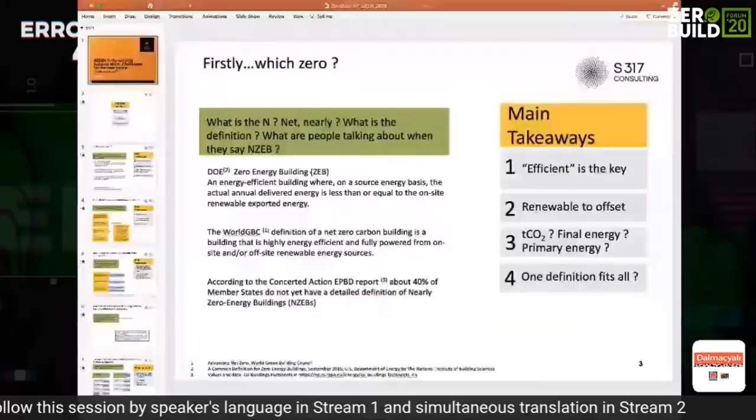Mr. Feliz, sorry to interrupt, but we are still seeing the cover page. Yes, okay. I guess you shut down the slide mode, and that works now. Okay, perfect. Just a little bit. Like this is okay. Could you please switch the pages? Perfect. Like this, it's okay. Okay. Thank you. So sorry. I cannot see what I'm doing, so please interrupt when you see that something is wrong.

So I was talking about the difference between the interpretation of net zero and nearly zero and so on. But even in Europe, where I think it's the most advanced status of net zero buildings and energy in buildings, about 40% of the member states don't yet have a detailed definition of what nearly zero means. And the 60% that already have a definition, the overall definitions are different from one country to another.

So even in a cohesive bloc like the European Union, no one has the same opinion regarding these issues. So the takeaway, I think, is that efficiency is the key. It could be net zero, it could be nearly zero, but we have to be efficient, probably as efficient as we can be. The renewable energy is there to offset the residual consumption that cannot be removed.

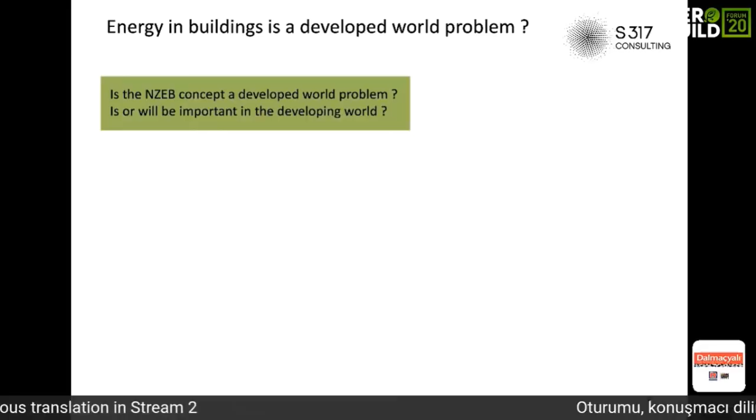Secondly, energy in buildings is probably a developed world problem. I think common sense tells us that the big buildings, the energy intensive buildings, are probably in the developed countries or the OECD countries, because that's what we know and read and see on TV and so on. So is this a developed world concept, or is it an overall global issue?

We know that the overall building energy is higher in developed countries, and we know that per capita consumption is also higher. But that's how it is nowadays. How will the situation evolve in the next few years? We know that the rate of increase in non-OECD countries is about 2% per year, so about 5 times faster than the OECD countries. So by 2025, they will be consuming the same.

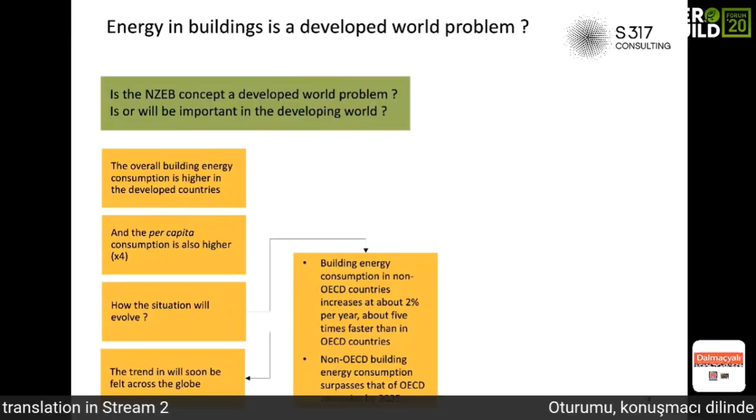And above that, I think that the non-OECD countries will be the main driver for energy consumption in buildings in the world. So it's pretty much a global trend that will be felt across the globe, and I think that we must deal with that. So the takeaways: it's a global problem, and consumption will grow everywhere. Can we find one solution that can fit all these different regions, all these different economies? I think that's one of the main difficulties of this whole concept of net zero.

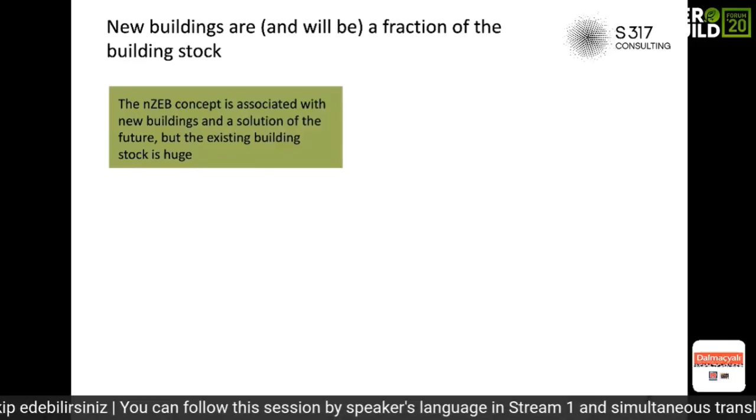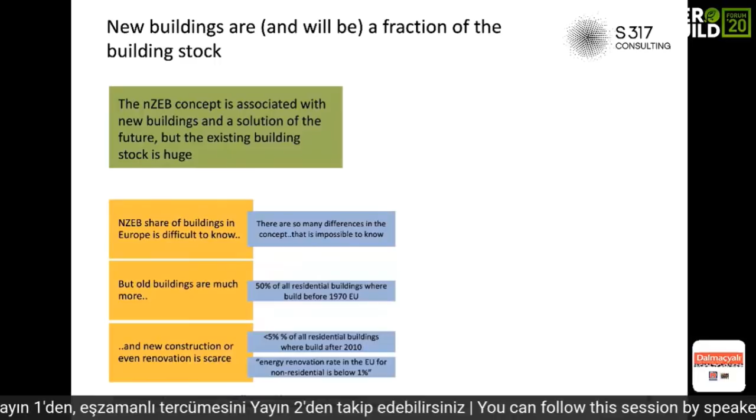New buildings are and will be a fraction of the building stock. The net zero concept is associated with new buildings. For example, the EPBD in Europe requires that new buildings go net zero, but the existing building stock is huge. So a solution for the future must be around the actual building stock. Also because it's very difficult to know the NZEB share of buildings, because, like I told you before, there are many differences in the concept, so it's difficult to know what is net zero.

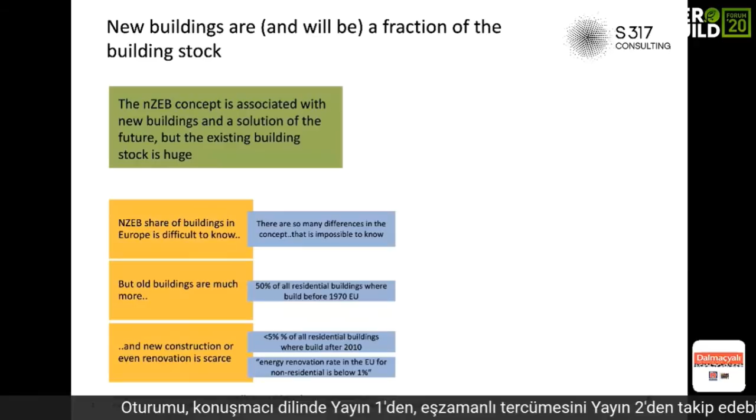But we know for sure that old buildings are much more numerous than new buildings. For example, 50% of all residential buildings were built before 1970, before there were building codes with energy consumption requirements. And we know also that new construction, or even renovation, is scarce. It depends from country to country, but normally there's not a huge rate of new construction. Less than 5% of all residential buildings were built after 2010 in the European community. And the energy renovation rate is well below 1% for non-residential buildings.

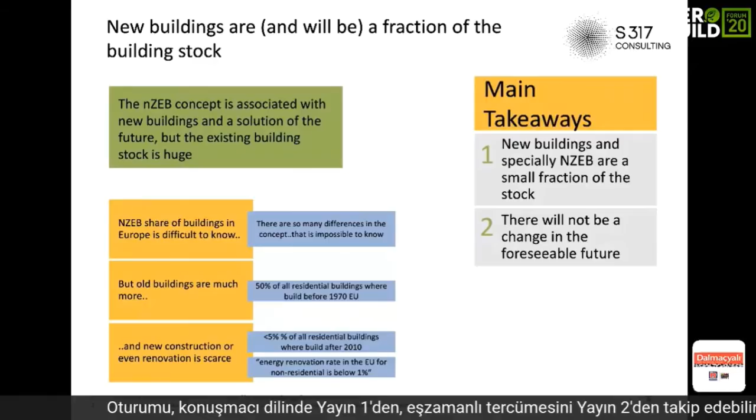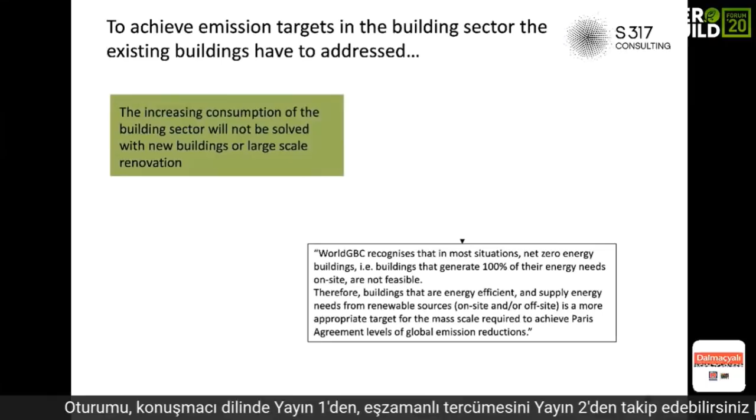So the building stock is very important to this. There will not be a change in the foreseeable future, so we have to rely on what we have now. To achieve the emission targets in the building sector, the existing buildings have to be addressed. Even the Green Building Council, an American-based but worldwide organization, says that we require mass-scale interventions to achieve the Paris Agreement levels. So we have to rely on the existing building stock.

So how can we aim for the real causes? What consumes energy in a building? Where can we improve? We have to be very sure of what to do because we don't have the money to do it all. So where can we act? We know that in residential buildings, heating, water heating and space heating, consumes around 80% of the energy. This is European Union data.

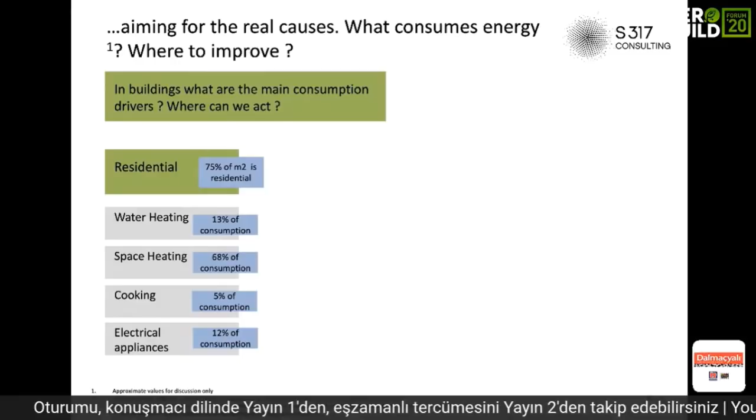Portugal is different from Germany. Germany is different from Turkey. But I think this gives a very good idea of the overall consumption. Electrical appliances and cooking account for less than 20%. This is important to know because residential buildings represent around 75% of the overall building area in Europe.

So probably in Asia and Africa, it's even more than this. So the commercial buildings, like we read in all the papers and all the books that talked about these issues, it's the HVAC, the ventilation, air conditioning systems, and lighting that take around 60%, 65% of the overall building energy. So these are, I think, the end-use consumption vectors that we have to make sure to address in the future in every measure that is thought to get a little bit of the net zero to these new builds, to these actual existing buildings.

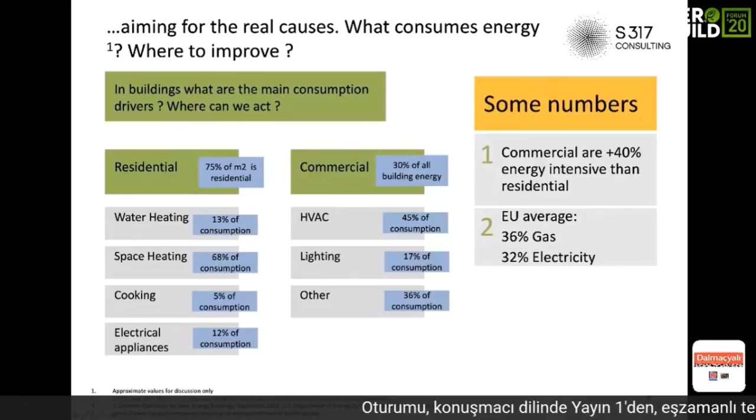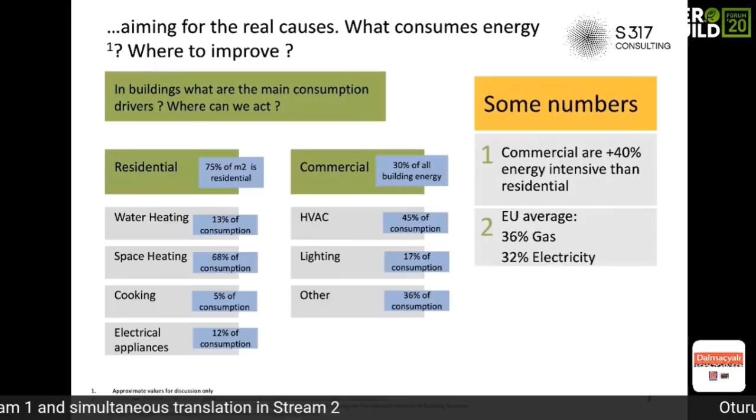So the numbers. Let me get to this number 2. In the European Union, 36% of the consumption is gas, natural gas or GPL, and 32% is electricity. So this goes really well with the heating vector. So it's fairly difficult even so to get the benefits of renewables on this without changing the overall structure of the consumption in each building.

So knowing these vectors is important, but which measures have the economic rationale for implementation? We have to make sure that we maximize the effect on the outcome, because the overall world, not just Europe, but everywhere, even more now, has economical difficulties. The financing is very limited for this. So all the measures that we take upon buildings have to be targeted to maximize the effects on the outcome, which is, of course, reducing the carbon footprint and reducing the energy consumption.

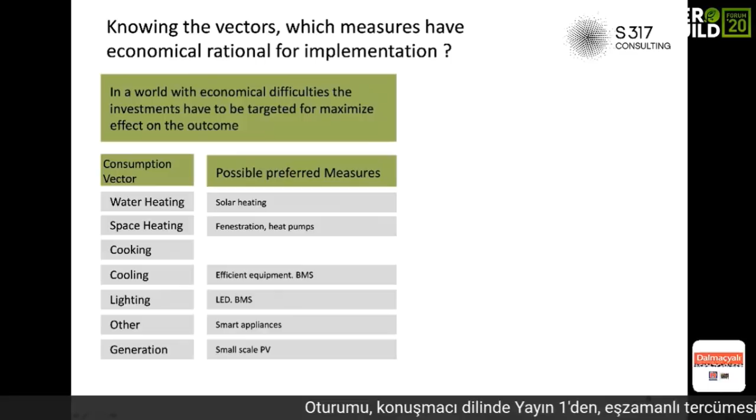So we know for sure that for water heating, for example, using solar panels is very beneficial. We know that space heating goes well with heat pumps, and changing a little bit of the fenestration, putting new windows in. For lighting, for example, we have LEDs and management systems for these, which I think are very efficient and very prone to savings. So we have to realize that we cannot go everywhere, we cannot do everything. We have to keep an eye on what is possible to do.

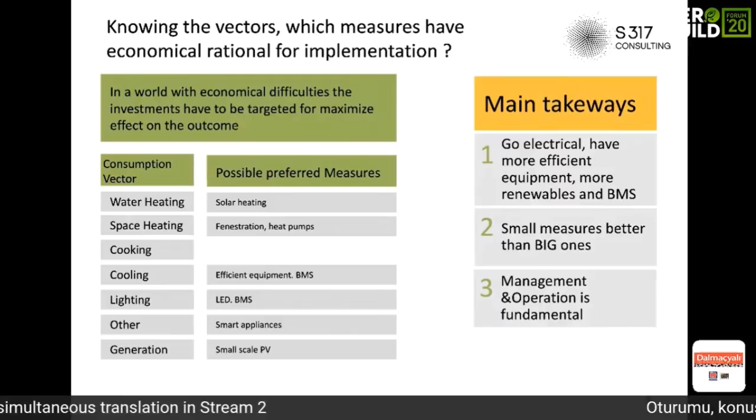So takeaways of this: go electrical, have more efficient equipment, more renewables, and more automated control systems. Probably small measures are better than big ones. They require less investment, less effort from the building owners, and less money to make. And of course, management and operation is fundamental. As we know, there's a lot of no-value or low-value measures that can be done with incredible effect in building operation and building consumption. So we have to make sure that everything is aligned to do this in a perfect and efficient way.

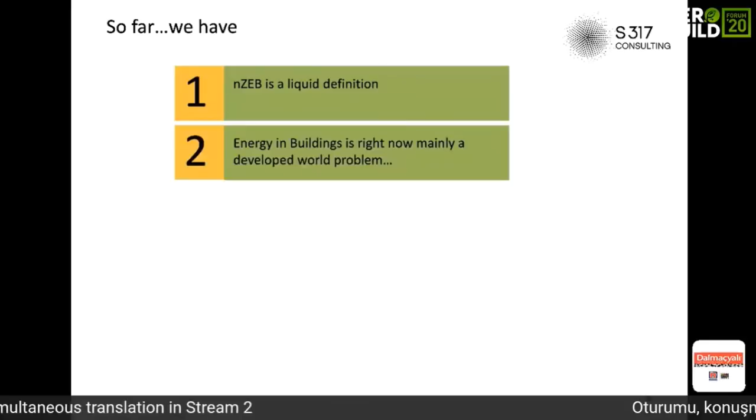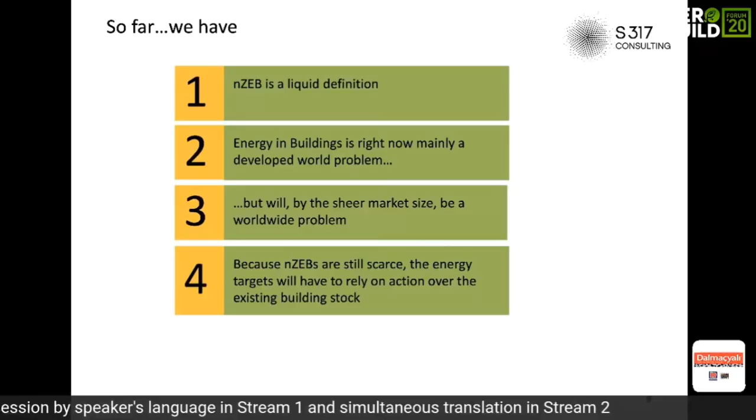So let me just sum up the presentation so far. Net zero is a liquid definition, so we never know what we are talking about, but we know that energy in buildings is a developed world problem right now, but it will be, even by the sheer market size, a worldwide problem. So we have to make sure that we have the tools to solve it everywhere. Because net zero buildings are still scarce, the energy targets will have to rely on action over the existing building stock. And with the known consumption vectors, the effort should be made for targeted measures that we know are easy to do and possible to do with our reality in terms of the economical and social issues that we are facing.

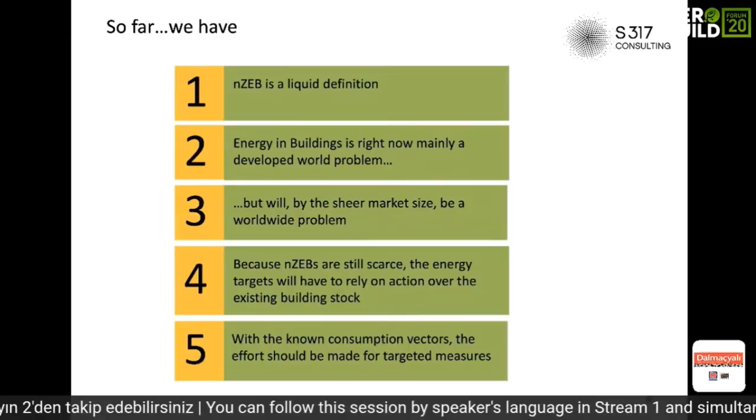So how to address the issue in the near future, while net zero buildings are marginal in number? We have to have an approach that settles all cases, new buildings, old buildings, and so on, that can help the consumption trend to be stable, at least stable in the near future. To start, it's not an issue just for the building sector, but we have to have a concerted effort between the public and private sector. So everyone has to be all hands on deck to do this.

And the main areas of intervention, firstly, is financing. So we have to sort out how to finance all this, because it's very nice to talk about net zero and to talk about energy efficiency, but someone has to pay. So we have to make sure that the financing tools are there to help this problem to be solved.

Then it's addressing the part of the efficiency that we talked about in the net zero definition. So energy services. We have to think and use a new generation of energy services and make available to all the tools for this reduction in consumption, to reduce the consumption to a minimum that can be offset by renewables. So renewables will offset the gap in reduction which is possible in each site.

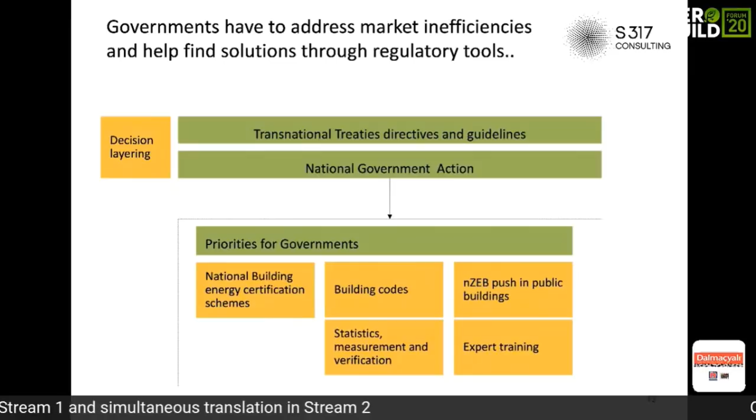Probably in the European Union there are more than these, but for example, Turkey, which is not in the European Union, has a good national energy certification scheme. We have a very good building code in the energy sector. And the government is now pushing for nZEB in public buildings too, and they are giving a lot of expert training. So all these, together with statistics, measurement, and verification, are essential tools for all governments. This can be done in the richest country or in the poorest country. But I think that these regulatory and policy tools are very, very important to address the issue.

And of course, the governments, I think, are the only ones that can give us some clever finance to solve the gap of energy efficiency in buildings in terms of financing. We all know that commercial bank money is difficult to get into energy efficiency. There's a lack of bankability for the projects. They are technically difficult to understand. They lack fixed income streams. This is important because this was the thing that could put finance money into renewables, because especially with the fixed feed-in tariffs, they become fixed income streams.

So it's kind of an annuity that is forecasted for 20, 25 years. So it's really easy to sort out the risk management of all this. But energy efficiency doesn't work like that. So it's difficult to do. It's very difficult for the banking sector to have risk management that can satisfy everyone.

So what the governments can do, they can give grants, right? It's the easiest thing to do. They can set up the tools for the ESCOs and for the energy finance market. They can make tax shields for energy efficiency. They can even set up more exotic tools like green bonds and carbon finance, or cross-subsidization for energy efficiency.

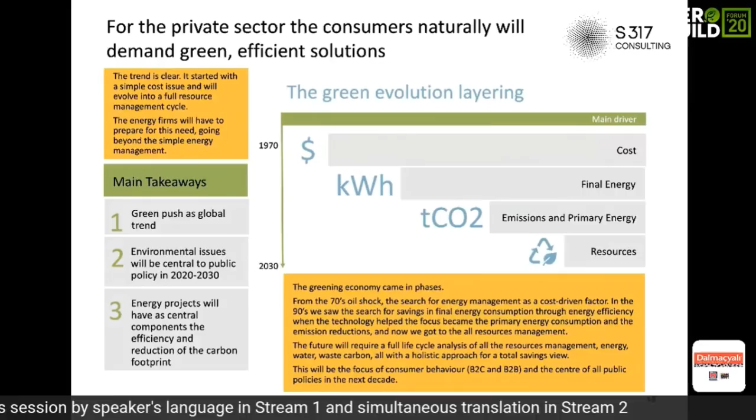So, you know, first was the cost in the 1970s, then final energy, then we started talking about emissions. Now it's the full resource, full life cycle assessment and so on. So there's a green push. I think in the richer countries, because the economy is a bit more mature, people search for different things when they have money in the pocket. So energy projects will always have these components of efficiency and reduction of the carbon footprint, whether in old buildings or newer buildings. So I think the trend is there, and we have to take advantage of that.

That will make the traditional utilities focus on energy services. So the market will go with the flow, I think. There will be no need for almost any outside intervention, and we will see new business models: PV service, energy as a service, on-bill financing. We are seeing a lot of different solutions to make this innovation and to make these services really trendy and really mainstream in the future, especially in the OECD countries.

How to do this? We talked about energy services, we talked about renewables, we talked about targeted actions. So let me give you a couple of real life examples. They are not region specific. They happen a lot in Portugal and Western Europe, where we come from. They are examples, but they will show the trend, and some measures and actions that were taken to solve all these issues. So, for example, smart grants.

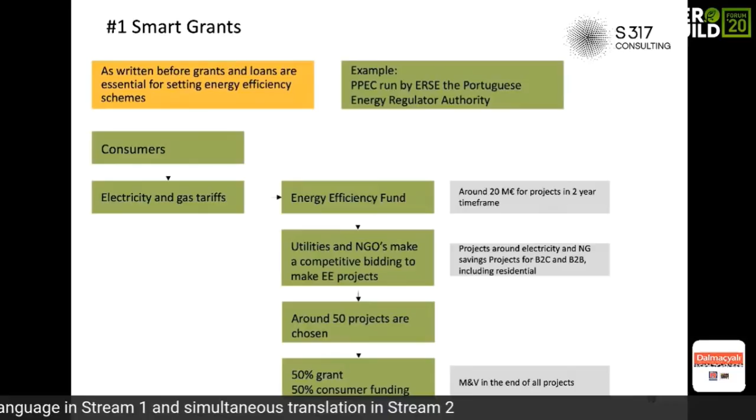This comes from electricity and gas tariffs. So it's not free money, but it's a nice way to give back to the community and to solve a lot of problems in this area.

So we talk also about the new energy services. What does that mean? These energy services are services made by contractors or made by companies that are targeted for building consumption vectors. There's a lot of examples. Who is giving these? Could be ESCO providers, could be contractors, could be window makers, for example, could be municipalities. There's a lot of entities that can help and that can be around these programs.

How is this done? So it's a government program. Could be utility services, could be consumer associations that do this. But basically, you set up programs and products that address, for example, water heating. So you set up a program that puts solar panels for hot water on the top of the buildings, the top of the houses, and they pay for that. Or changing the lights of residential places, or even changing your fridge or your microwave for a newer model.

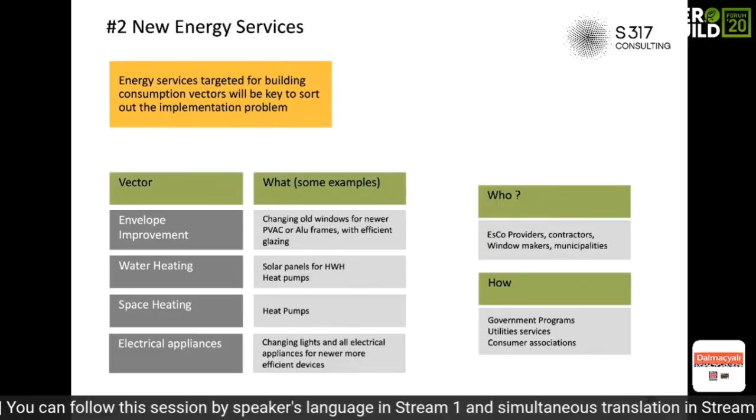This can be done with a lot of different methods, a lot of different finance issues, a lot of different ideas. There's a lot of new products, new business models to be done. Another issue we already talked about briefly is how to connect energy consumers to energy saving providers. How can we match people that want to sell and build to people that want to save? This easy market access is vital, not just in developed countries, but also in underdeveloped countries, because the problem is there anywhere.

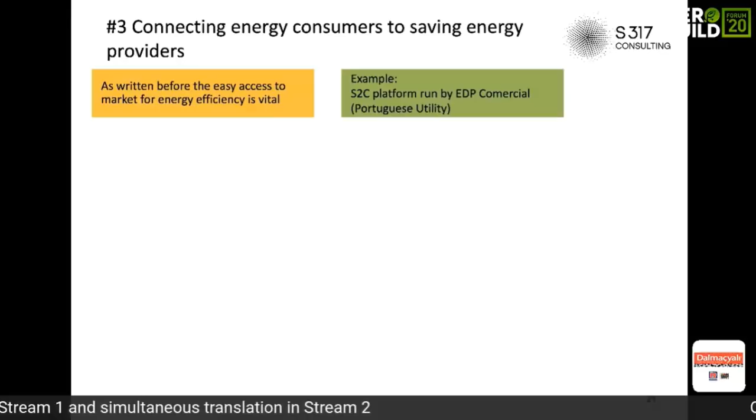For example, EDP Comercial, the main Portuguese utility, developed a web portal that acts as a middleman between consumers and the efficiency marketplace. They connect consumers to contractors and ESCOs and whoever can do energy efficiency measures. Anyone can Google Save to Compete and take a look. There's no fuss. You choose the measure, you say how many lights there are in your place, the inclination and orientation of your roof, and the system, with a clever algorithm, gives you a cost and a payback which is approximate to the reality of the consumer.

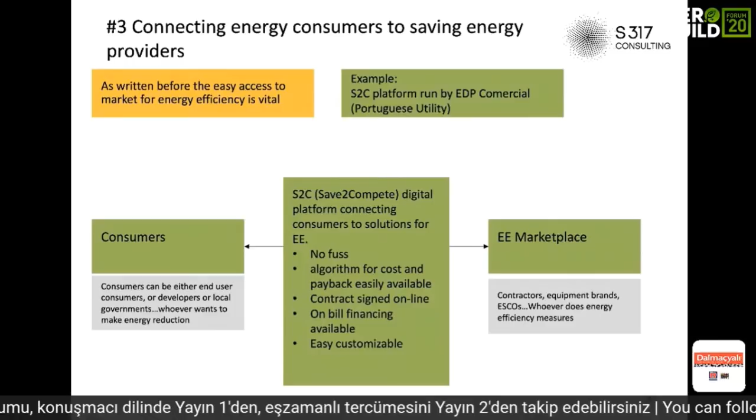You can sign a contract online. You can have on-bill financing available. It's very easily customized and very easy to make everywhere. So these kinds of platforms, web portals, digitalization of the process, are really important to connect contractors, equipment brands and representatives, ESCOs, and consumers. This gives easy access to people. There's no small project, there's no big project for these kinds of platforms.

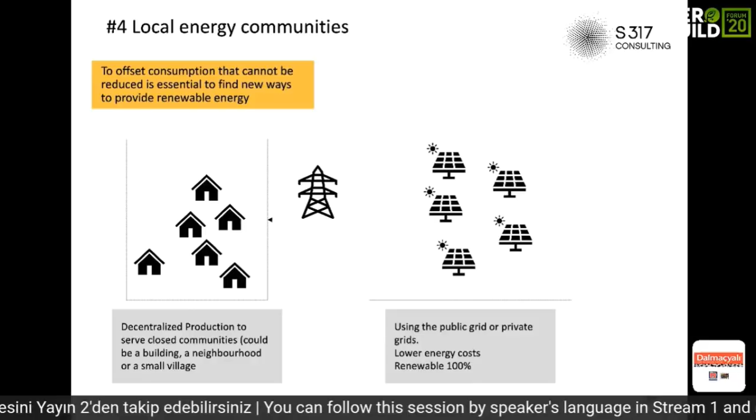And lastly, the local energy community. This is important. This is referred to in probably the last European directive. Make your own grid, make your own small PV production. You can do this in a building, in a small neighborhood, in a small village. Basically, it's to put, for example, a solar photovoltaic park to sort out the consumption of a few houses or a few neighborhoods. So it's 100% renewable because you are not using the public grid. It's cheaper. So there's a lot of advantages doing this.

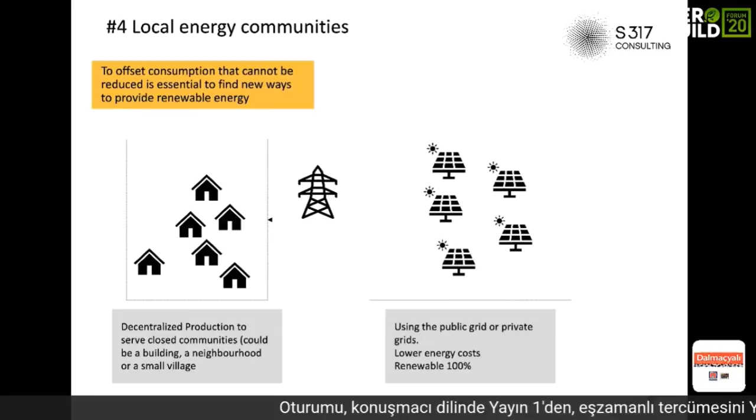And this could be done, I think, everywhere, because the market is here for everyone. Like the energy services, there's a lot of different views, different ways to see this and to do this, but this will be part of the future, I think, everywhere. So lastly, this is the last slide.

I just want to say that having a very nice, flashy net zero building in the middle of New York City or London is, on site, almost the same as having a slum in the middle of an Asian city. On paper, they don't have the input of energy, but one has great indoor conditions and the other one has nothing. So we have to make sure that we sort out energy poverty, because as soon as people get out of energy poverty, they will consume more. So we have to make sure that everyone is on board, and that we can keep everyone on board while meeting the emission targets.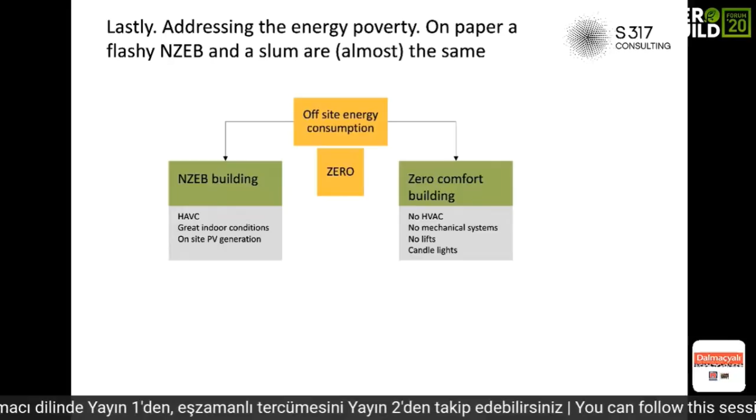So we have to address smartly all these issues. So wrapping up, we'll have to rely on the actual building stock to meet the targets, which will be even more difficult as the billions in Asia and Africa have more growth, have more money, and will consume more energy. So with the known consumption, the effort should be made for targeted and simple measures that are easy to implement.

The governments have to act through regulation and early market intervention. They have to be enablers of the private sector, which has to address the consumer and the people's needs, offering new services, and to try to reduce the trend of growing energy consumption in buildings. So I hope you have enjoyed. It's the end of this.

Thank you, Mr. Feliz. That was a perfect presentation. It was amazing. Thank you. Thank you so much. And thank you for your timing, by the way. I was looking at my clock, so thank you. I was trying to be on time. That was really good, especially the items you highlighted. Those tell us a lot and make us question. Thank you for the solutions you suggested. We are very lucky to see you on the forum.

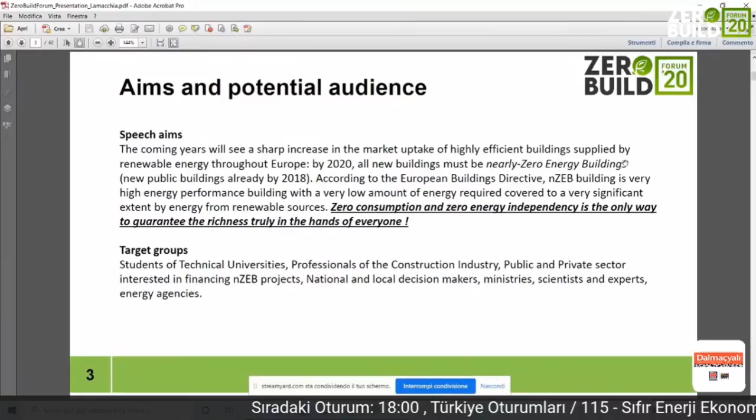What is my network? I am the president of this network, and I am also the founder of this large structure in Italy that is based on the four actors in the building industry. What does the four actors mean?

This means that the building will be built only by the decision of 4 people, of 4 actors. The first one is the professional, that is the designer. The second one is the owner of the building enterprises. The third one is the public administration, and the fourth, very important, more than the other ones, is the buyer of the buildings, the simple citizen, the simple public citizen that is considered at the last of the construction industry. But in our opinion, and in the field and in the speech of energy efficiency, he is the main actor that comes before the other ones.

So there are different relations among different bodies, public and private, in Italy, and we are also in a relation by means of partnership, for example. What is our location? We are located in the European capital 2019, in Matera, and we are also stimulated by this location because it's the best example that could witness to the world the possibility to live for many thousands of years and to guarantee also the living inside a built environment.

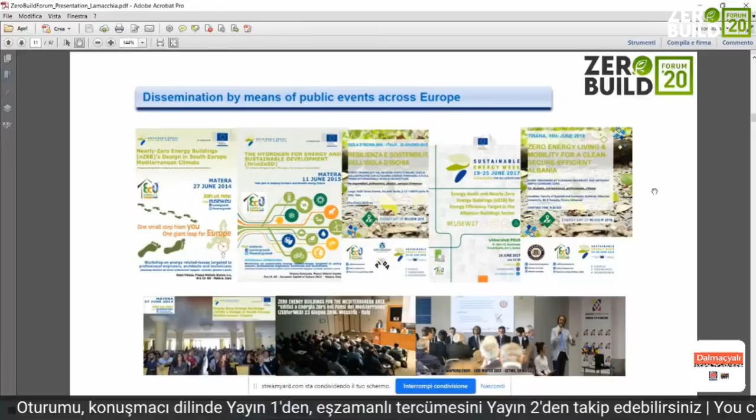Some photos to show you our large relations across Italy in different areas, and with many thousands of people during our trip and during our professional journey in terms of training and in terms of public dissemination. Above all, I remember our fundamental operation in the sustainable month of EUSEW, European Sustainable Energy Week, that every year Europe organizes by means of energy days, and in which we are very active by speaking about the energy efficiency target. What about some considerations worldwide?

Hello, do you hear me? Hello, yes, we can hear you. Thank you. And thank you for the perfect presentation, Mr. Lamacchia. That was amazing. Thank you so much. Actually, we had a question for Mr. Feliz, and I want to ask that to you too, because that was a great question. So you are from Italy, and as we talked with Mr. Feliz, he's from Portugal, and as you know, we all are Mediterraneans. And sorry. Hello. Yes. My presentation is not finished. So, live problems, it can happen, there's no problem.

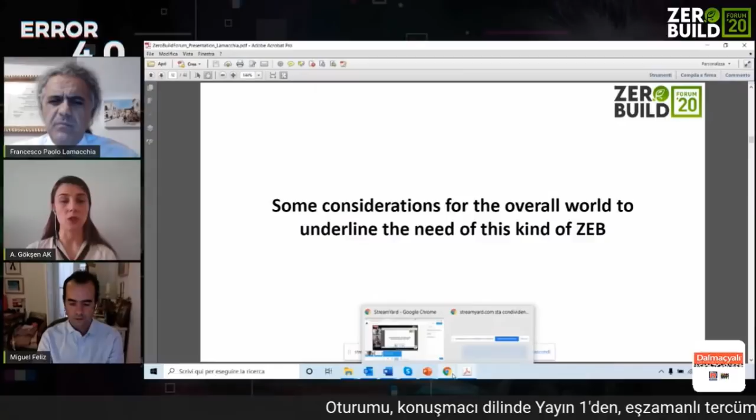So we can say both of us are Mediterranean, Italy, Portugal, Turkey, Greece, Spain. So do you think it has more advantages or disadvantages for zero energy buildings? Also, passive house standards are a bit different for our climate zones. Is this a good thing or a bad thing? What do you think about that? So I asked, zero energy buildings, also passive house standards are a bit different for our climate zone. Yes. For Italy, Portugal, for Mediterranean countries, as Greece, Turkey. So do you think it has more advantages or disadvantages? No, it's not advantages. In the continuation of my presentation, there will be specification about the importance of the bioclimatic approach to deliver the zero energy building model depending on different climate zones.

Zero energy building, I think, is not only a topic or an investment for Northern European countries or only for Southern European countries, because I think it's a winning model. It's a winning model for everyone, because we know from many years, from many researchers in the past, we have a lot of techniques and a lot of devices and technology now, and this technology is accessible to all at a low price.

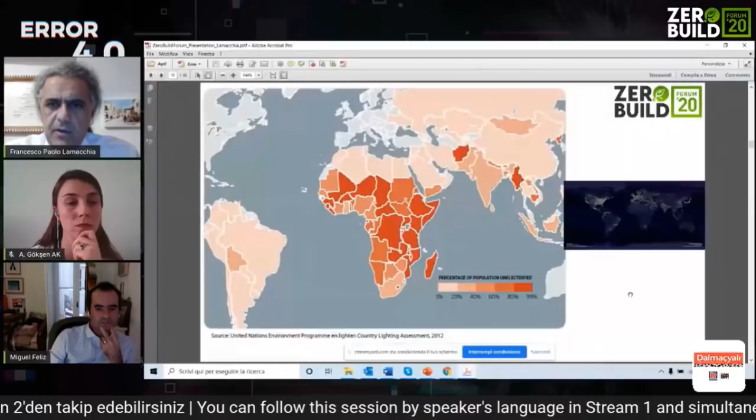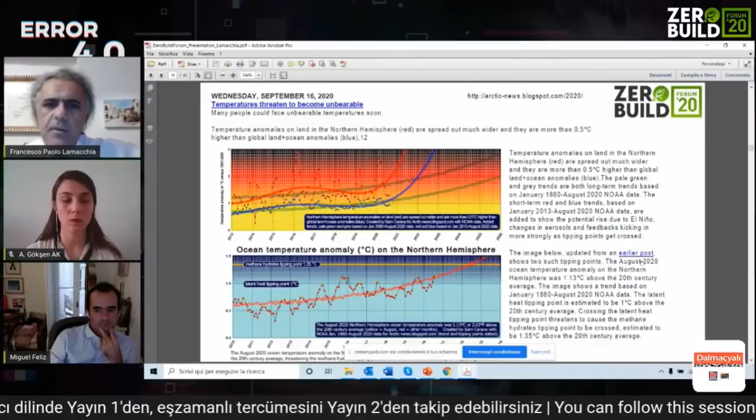So starting from this reflection, I see that the only model to save us, to save the planet and to save the lives of many people is only by adopting strongly and fast this kind of model named zero energy building. At the same time, there is the latest news of 2 or 3 days ago, in which we are fitting curves that are like exponential in terms of temperature, and at the same time 90% of the world is based on fossil fuel, but the worst thing is that at the same time we have a Paris Agreement and a lot of policy, the emissions continue to grow.

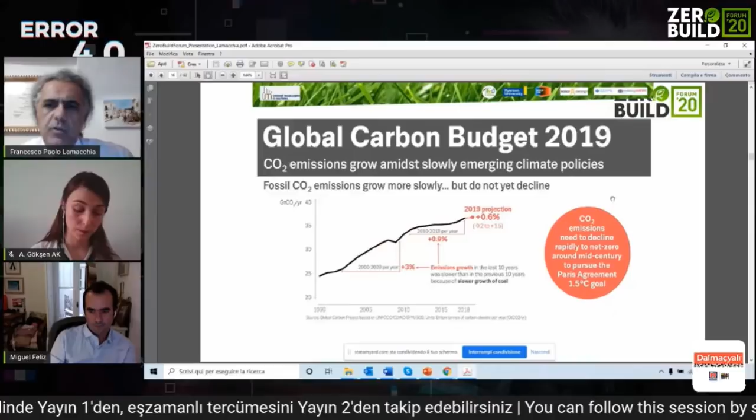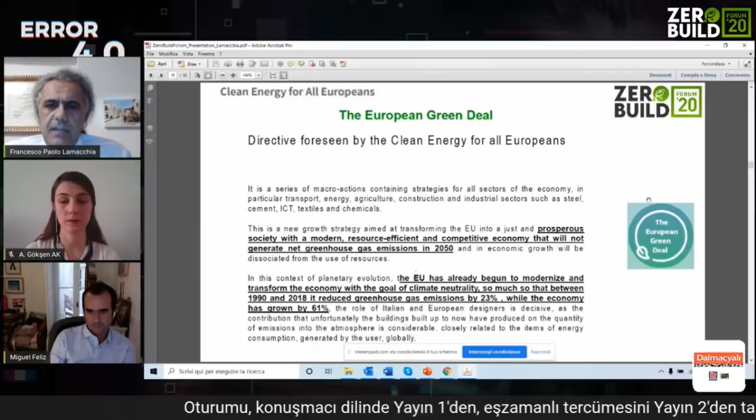And what is the response? Because the planet is not in the hands of everyone, but it's in the hands of some important continents like Europe. And I know my country, Italy, that belongs to Europe, and I could speak about the framework and the policy that will characterize our future in the field of built environment. And I would like to show also to many people that don't live in Europe the European Green Deal, that looks until 2050, and in which we have realized a first step in 2020,

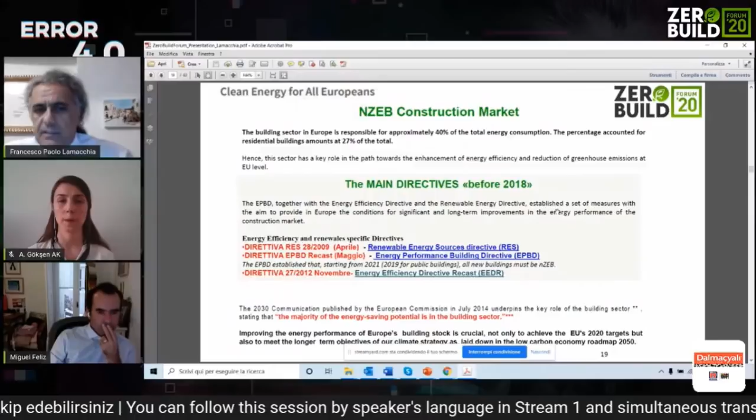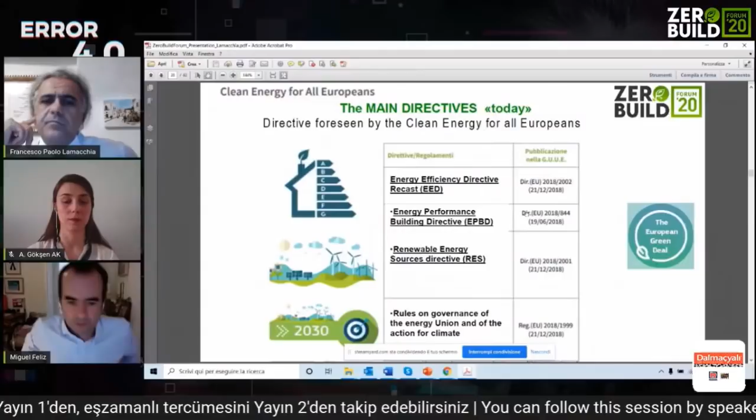now in this year, but the progress started many years ago, 10 years ago, because the main directives that drive the built environment in terms of high energy efficiency were three important directives. The first one about energy performance of buildings, the second one about renewable energy sources, and the third one regarding energy efficiency, above all in public buildings. But these three main directives have now been updated, and we have this list.

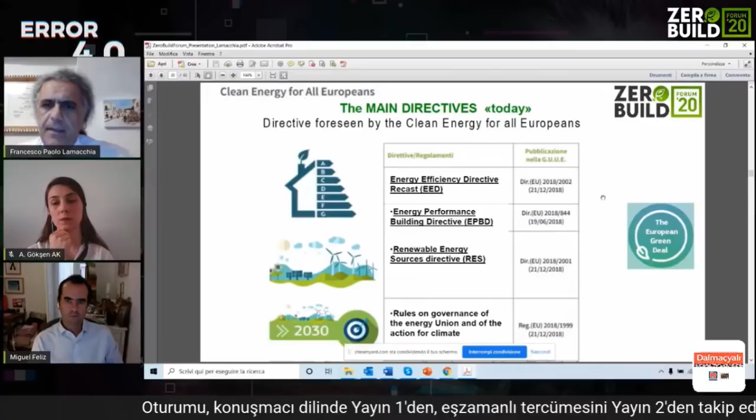So I would like to summarize the action of this policy, and I would like to give all the audience some important references and push them to tackle and study in depth this kind of directive. And what is the main achievement of this last European directive? There is an important consideration about the integration of buildings with electric mobility. So a new concept in which we would like to produce in the place we live the same energy we use in mobility. And the second is the introduction and integration in the building of artificial intelligence.

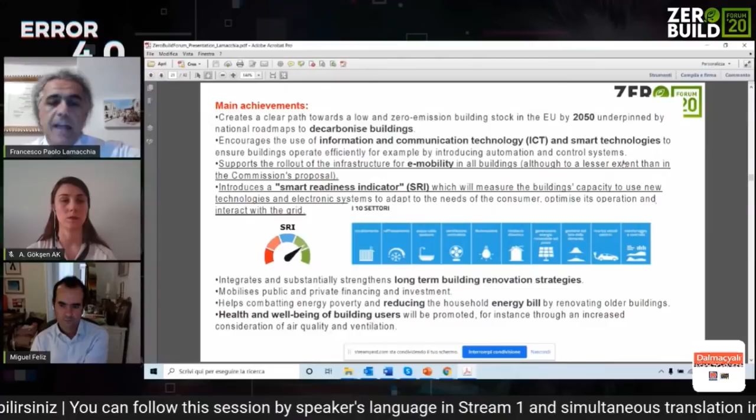So that means the smart readiness indicator, which is based on 10 sectors, for example. So these are the new trends and the new skills that many professionals will acquire in the very soon future. So starting from the fundamental directive, we had in 2010, 10 years ago, in the article of the European Energy Performance of Buildings Directive, the definition of nearly zero energy building.

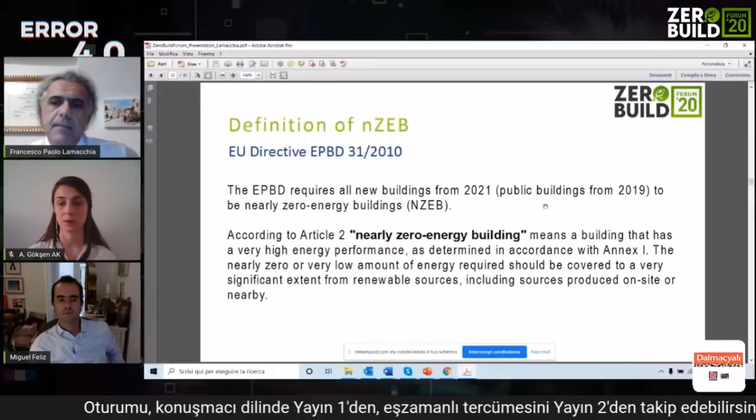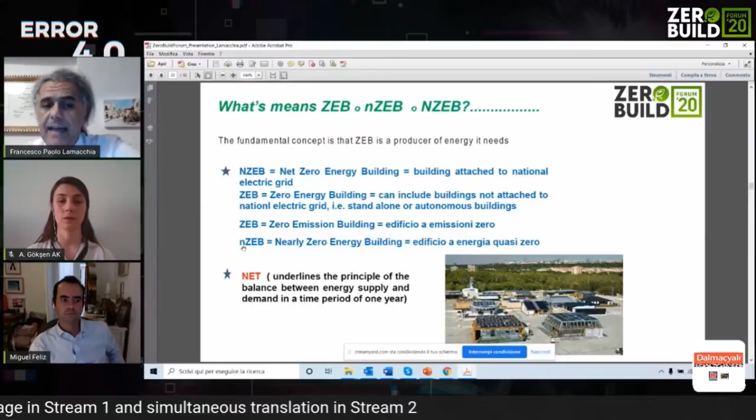That is a building with low consumption, but at the same time profiting from energy coming from renewable energy sources, not only far away from the building, but maybe also on site, near the building. But pay attention to the definition and the use of acronyms, because I would like to underline that ZEB is not only the acronym of zero energy building. It could be zero emission building, and that is another concept, deeper in a technical sense. And there is also the presence of the letter N, uppercase or lowercase. So there are different possibilities to define it.

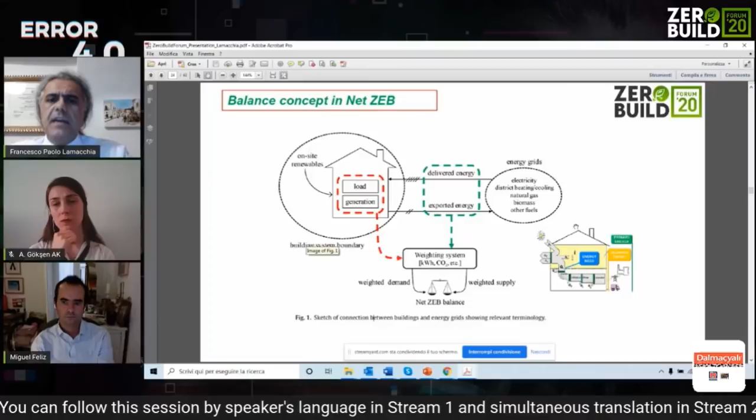And to summarize, what will we consider this kind of building? We have two paths, two possibilities: a green possibility represented by the green line, or a red possibility. So we can conceive an independent building, the so-called standalone building, in which we produce all the energy we use, detached from the national electrical grid. Or we can exchange and link to the national electrical grid, and we can have an equal balance between the delivered energy and exported energy, as the sketch shows.

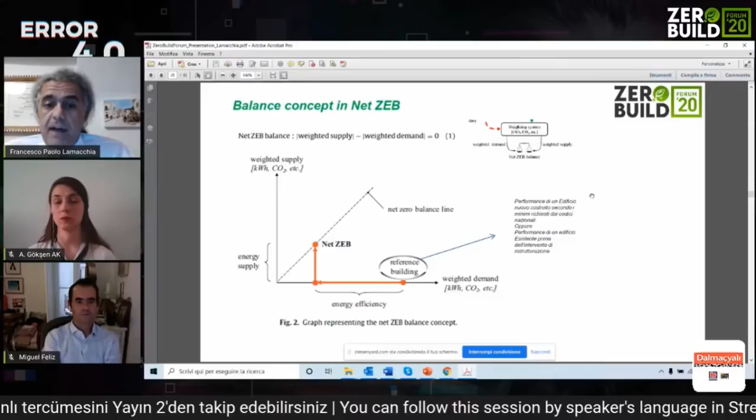The second important pillar to consider for tackling this kind of model named zero energy building is also the approach in terms of existing building, because we have a building stock full of many not saving measures. So we have the need to decrease the energy demand before we will renovate them.

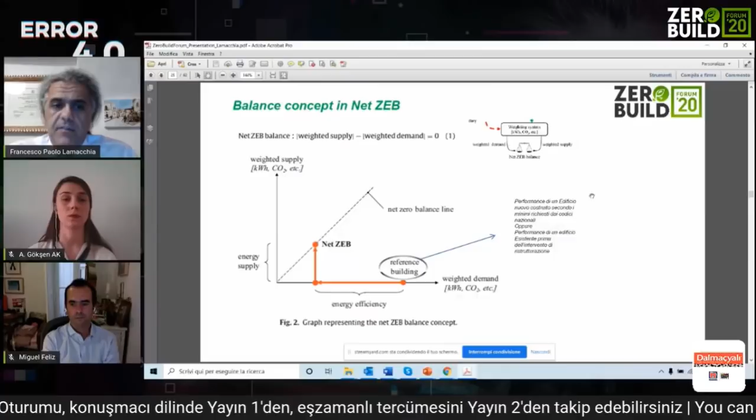So after decreasing energy demand, we can supply energy by renewable energy source, and we can walk on the row, on the orange row in vertical position, until we are in the diagram, in the exact middle point, as the sketch is representative.

So why, after this consideration, we must be aware and we must take care about the built environment, and why we must speak about protocol or guideline or standard and so on, because it's not possible now, due to our needs of comfort and high standard level in terms of wellness, to speak only about structure and envelope, but we need air conditioning, so we must integrate equipment. And it's not only sufficient to speak about envelope and equipment, because the building interacts with the environment.

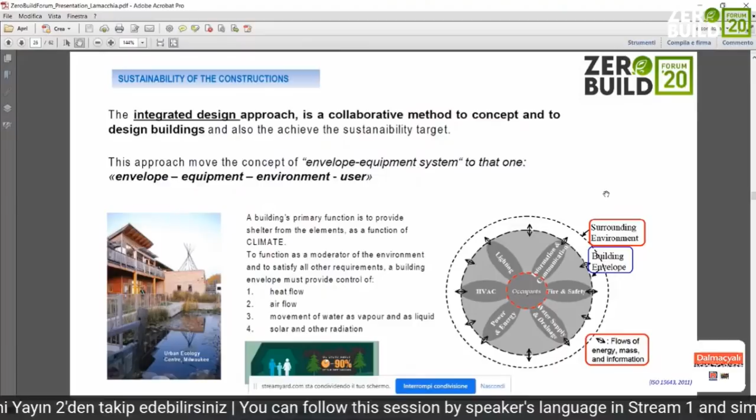And once we finish the building, the problem starts from the end of the realization of the building, because there is a driver of that building, that is the so-called user, that will maintain and will drive that building in the best way. So it's the same example of a car, in which if you have a user or a driver that is not well educated, it could consume a lot. And if we haven't a user that is well educated to consume low quantity of energy, we can go until a great problem. And I will show some other example of this one.

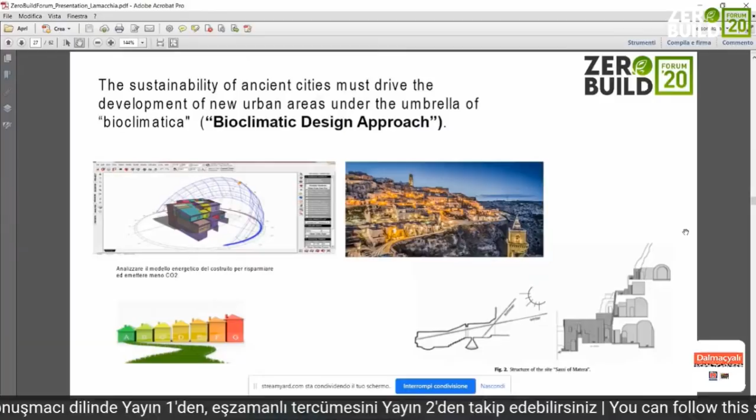Why we must start by bioclimatic approach? The first consideration is that the bioclimatic approach has driven the world and the built environment of all ancient historical centers across the world. So we cannot delay this experience, but at the same time we have experimented that in that historical center we live fresh during the summer and not so cold during the winter. And in that era, there weren't insulated thermal materials. So there is maybe a winning approach to start in this consideration.

And I remind all, the different climate zones was a topic very studied, not yesterday, but many years ago. My mind goes to Victor Olgyay, for example, that was the first to write a great book named Design with Climate, in which he divided the world in 4 great areas, depending on the 4 great climate conditions. And if you see the globe, normally we cannot use a model built, for example, in Norway, and consider to adopt it in Cyprus, for example.

So the use of a standard for all is not a possible way to have a success, I think, because we must guarantee the freedom of each designer worldwide, and we must also adapt the building to the climate zone. And moreover, we must satisfy also the wishes and the needs of our client, our commitment that pays the building and with their money wants to do what they want.

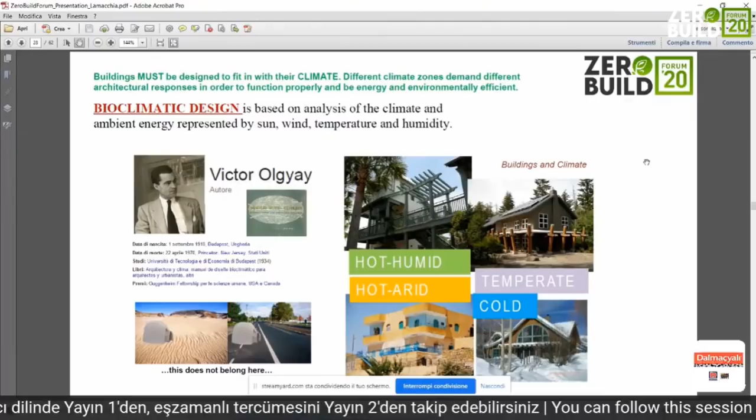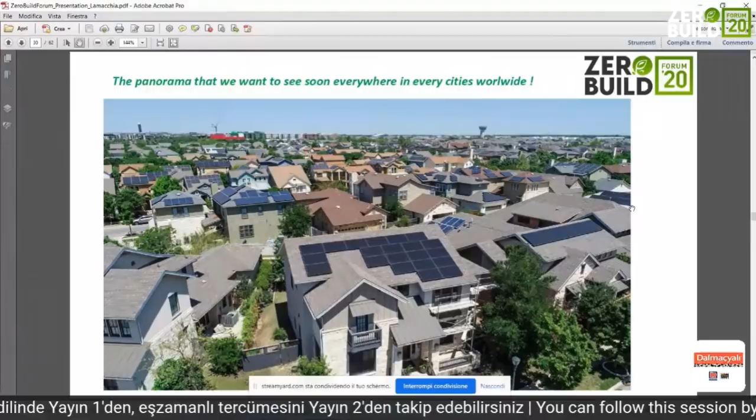So after this consideration, what is the implementation? And after the bioclimatic approach, what happened? Maybe we would like to see each city like in this photo with the same panorama, because we have the integration of the renewable energy source, the integration of technology, and unfortunately, we don't see this in each country or in each city. And what is the solution? I mean, one solution, for example, active house or zero energy house.

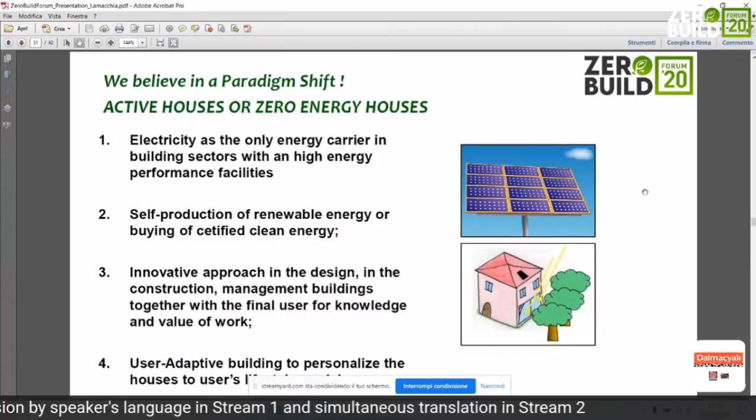What it means is a house without gas, completely electricity based, by self-production of renewable energy, and with an innovative approach in terms of design, because the design of the building is bespoke on the wishes of the user. So there is, after this kind of design, a user adaptive method to personalize the building to the user life.

And this is very, very important, because I remember our building and our house is like a big car that costs 10 times more than a car. So in what way we can transform without gas, for example, and in what way we can profit also from the particular components of the building, these renewable energy sources.

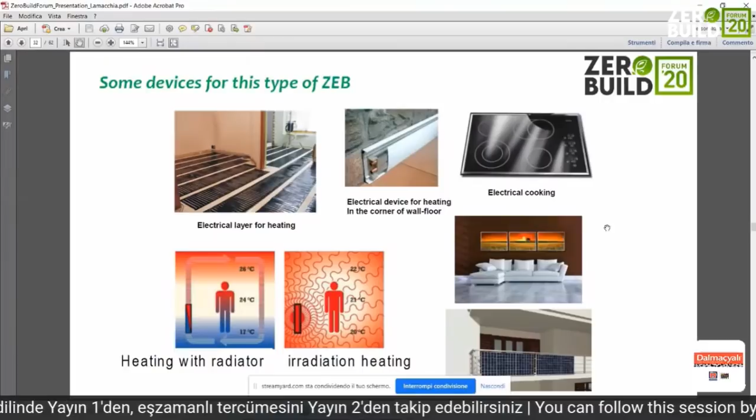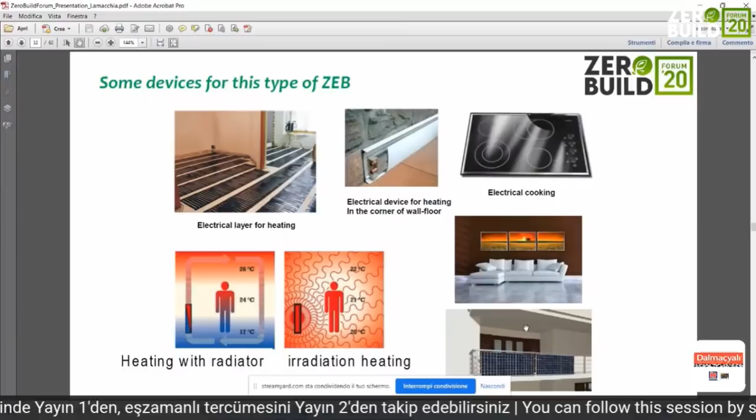The internal wall could maybe be transformed by electrical panels that give us irradiation heating, or for cooking we use inductive electrical cooking, or an electrical layer for heating in the floor, above all in old ancient buildings. Or on the balcony, outside, we have a lot of space in which we can transform the vertical position into vertical use of solar PV plants.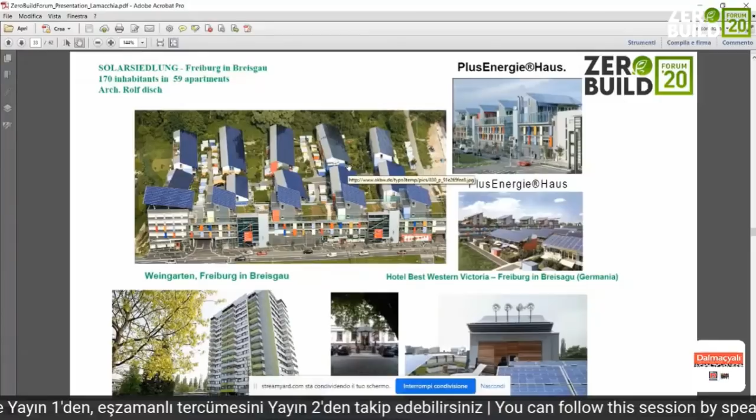And there are many examples. The most famous was more than 15 years ago, in 2003, the famous Sonnenschiff in Germany. And this is for me very reflective, because if I think of the sun in the southern part of Europe, this kind of model could be for me a standard, because if we transform the roof completely into a PV plant, all the sun that falls on Italy or the Mediterranean basin could transform our life, our money, our richness, and so on. But until now, we don't see this.

And why? We are all responsible, I think, and we must act all together to replicate this kind of model. Maybe one reason for the lack of this kind of building: I remember in my studies, when I took my degree, there wasn't a particular course about the integration of renewable energy sources. So maybe many professionals worldwide are not used to integrating these relatively young technologies.

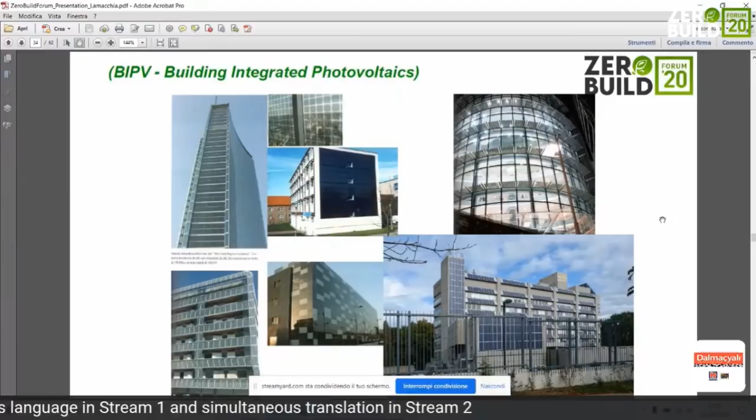But if I show this picture, you can see that simply a gray concrete building, like the photo at the right below, the USA embassy in Geneva, Switzerland, has been completely transformed by excellent integration of a blue panel into the gray concrete facade of the building. And maybe we need to take courage.

Because another strong message is that maybe a PV plant doesn't function in vertical position. But this is not correct; there is a loss of production, but also in many areas, like in Austria or in Germany, where the sun gives less production, there is high producibility and the possibility to give the energy they want. So we need to be encouraged.

Another important pillar that I would like to underline is that when we design a zero energy building with high energy efficiency standards, we risk falling down, because when you have an electric house you could have big expenses in terms of electricity use. So pay attention: when you design a zero energy building, you must keep the possibility under control, and you must realize ICT controllers in the building. So you are obliged to use ICT measures, for example, building automation.

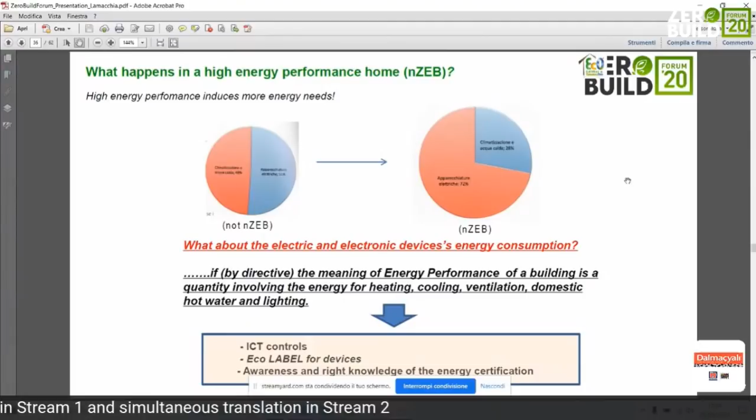You must use ecolabel devices, because if you use devices not under ecolabel, you can have a lot of expenses, and above all, you need awareness. What does awareness mean? You need to know the building in which you would like to live better than the owner of the building enterprise. So the awareness comes from a guideline, for example, from a training program that each owner of the enterprise, after realization, will give to the buyer of the apartment.

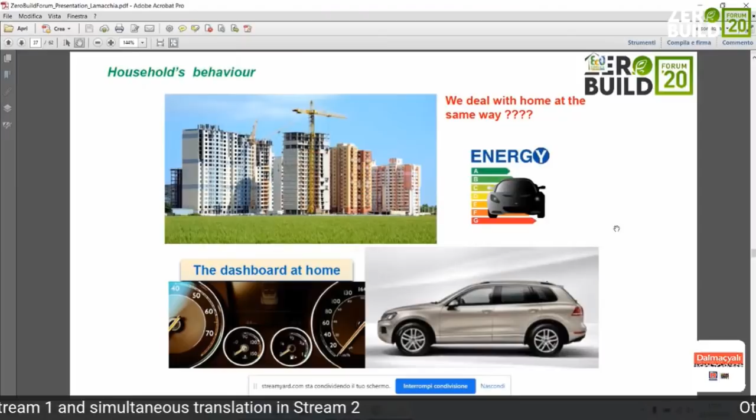And why is the car very similar to the building, in our opinion? Because if you reflect, we have underlined that a zero energy building needs control. But in what way is this control possible? In each car there is a dashboard. Why in the zero energy building model, or in all buildings in Europe, aren't there dashboards? This is a great opportunity, I think, because when a household sees the dashboard of the energy consumption, it can change its behavior inside the building quickly.

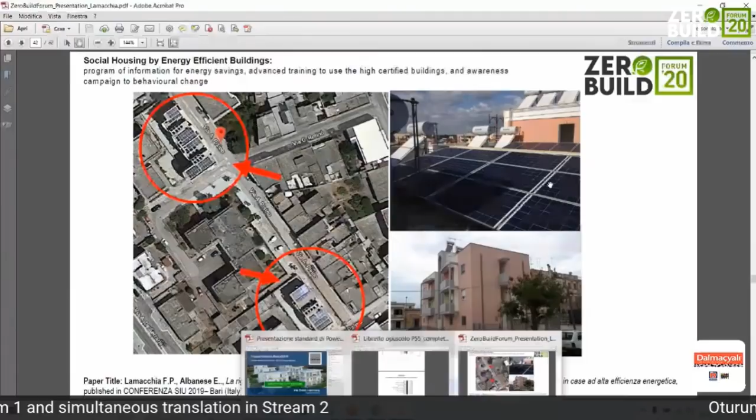So what we have done in Italy, and we have published, for example, is this example in the southern part of Italy, in Lecce, in front of Albania, in the heel of Italy, in which we have regenerated a district, transformed these 2 buildings from old construction to new construction, and put the renewable energy source on the rooftop, also for solar thermal integration. And the best aim we have achieved is the change of the mind of everyone. Because in person, I followed these people.

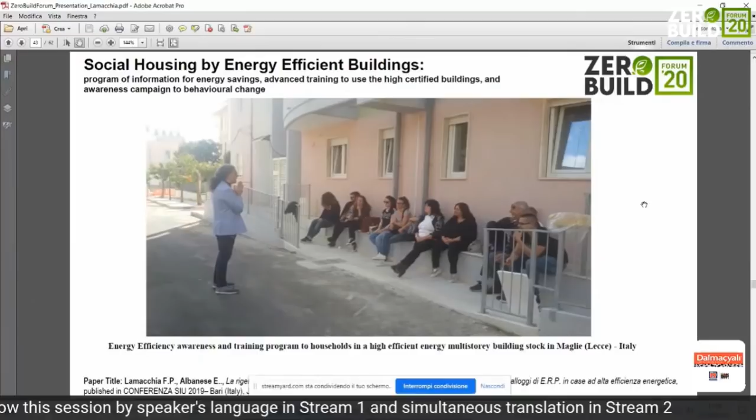In person, I follow these people, and I gave them the training program about the use of these kinds of buildings. So we had a low energy bill, and we had a completely different approach of the user in this kind of building.

Another important study we have tackled in the past is one in which we can calculate, and we have done this, a zero energy building in a portion of land in the southern part of Europe, for example, Rhodes Island, very close to Turkey, where there is a lot of tourism.

So we are going to another important sector, the hospitality industry, in which, if you reflect, there is good leverage to change Europe very fast, because many people pass through a hospitality building, a hotel. For example, in Italy, in one year, many people sleep in a hotel. And if we change the hotel before the residential sector, maybe we can change minds quickly and have replication of that model also in residential buildings.

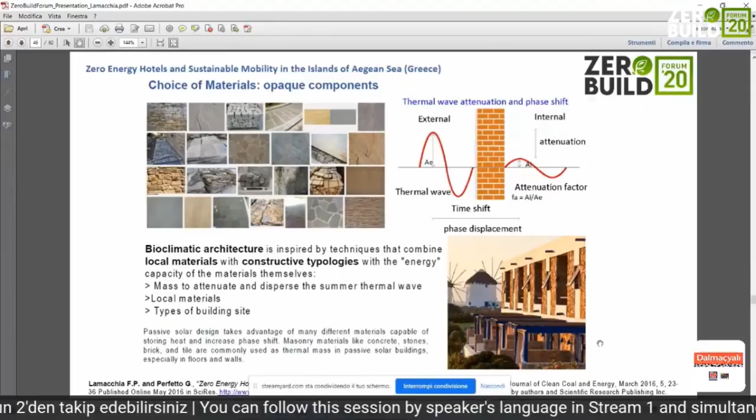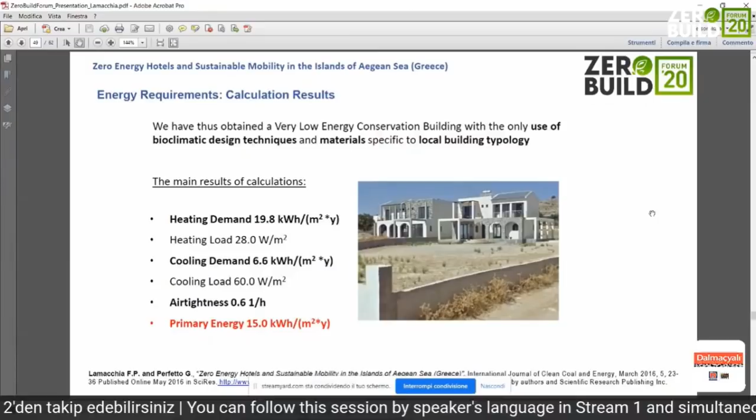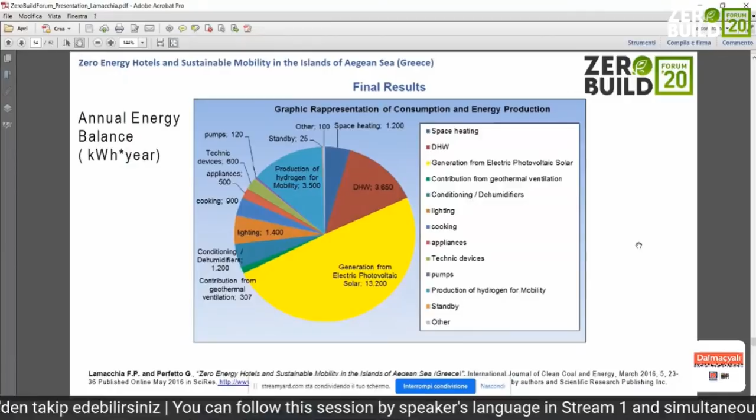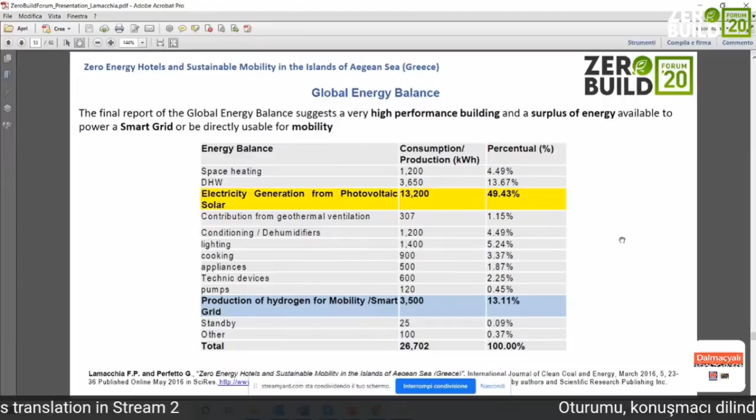I showed this number also in this other table, in which we have 50% of electric generation from photovoltaic solar, and the surplus used for the production of hydrogen. So why is this possible with minimum effort? Because Rhodes Island is the best place in Europe, with the highest producibility in Europe. So there is also the possibility to profit a lot. There is a paper published in an international journal in which you can check and follow this calculation.

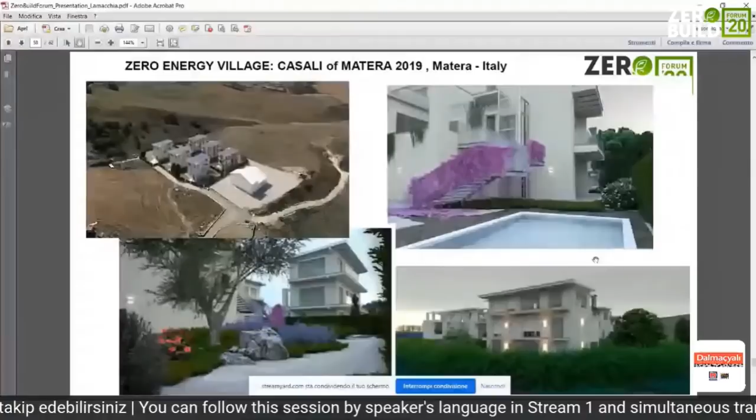The second and third example is the zero energy village in Matera, in the southern part of Italy, in which we are realizing six independent villas. This village was certified for the first time under the Zero Energy Building Network in Italy, and as a particular technical solution we have integration of renewable energy sources on the rooftop, but also equipment based on a cooling and heating floor system, mechanical controlled ventilation, solar collectors for domestic hot water, and an air-water electric heat pump.

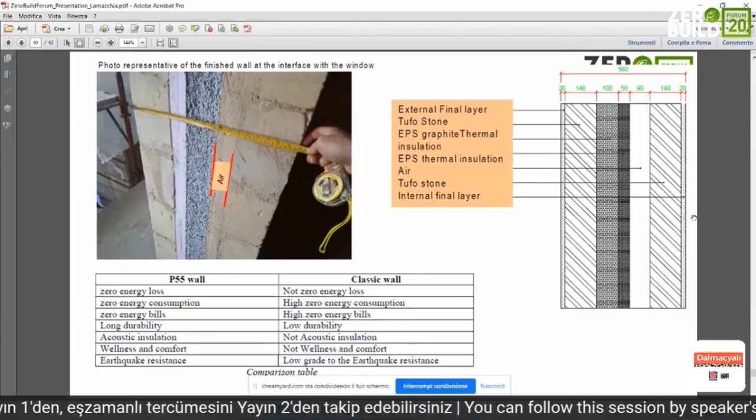So there are numbers that guarantee, for example, that with 10 kilowatts we can cover the complete sufficiency of the energy need. And the most important feature of this building is the envelope, because we built it as a 55-centimeter wall, with insulating material, but the major part of the wall is made of a typical stone of Matera named tufo, which is natural in our territory, accessible at low price and at zero kilometers.

So I thank you because I finished this presentation, and I am available to answer and reflect with you about questions and other discussion.

Thank you, Mr. Lamacchia. Thank you for the presentation, and sorry for interrupting you twice. The first time I thought you couldn't continue the presentation because of technical problems. But fortunately, it was resolved, and we listened to the whole presentation with great pleasure. Also, for the question I asked, our audience got the answer in your presentation, so thank you so much.